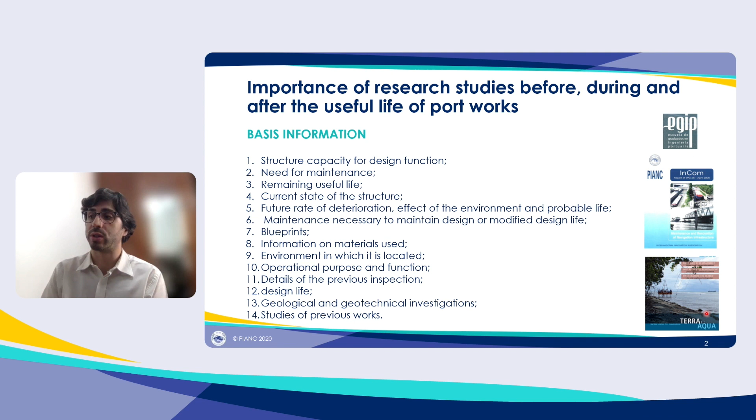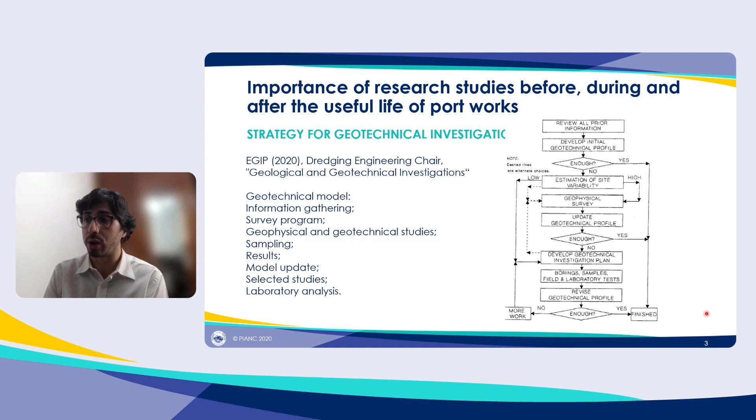As an example of a geotechnical investigation strategy, it is based on the information collected and the visit to the sites, allowing a good enough understanding of the problem to be able to propose a geotechnical model of the area under study. Based on the results obtained, a first measurement campaign is scheduled that includes a geophysical survey and surface sampling.

Understanding by all parties of the implication of going down early contractor involvement routes, and a shared willingness to accept the implication, are crucial to the achievement of benefits. Structuring an appropriate construction framework to deal with the early contractor involvement stage may be needed to provide the necessary confidence and protection. It's a strategy needed by infrastructure owners towards the main contractor, optionally expanded with stakeholders and subcontractors.

The purpose of this is to optimize value in project delivery and objectives through their participation and knowledge sharing in the stage of project planning and design prior to execution contract award. The hallmarks of a successful ECI process: good faith, transparency, equal treatment of all parties, fairness, clarity through clear rules of engagement, and protection of intellectual property.

The input of contractor expertise into the development of design and the definition of client requirements during the pre-construction phases of a project is particularly relevant to structures projects, including maritime and inland waterway related projects. It raises the convenience of the adequate provision of geotechnical information to avoid subsequent claims in contracts.

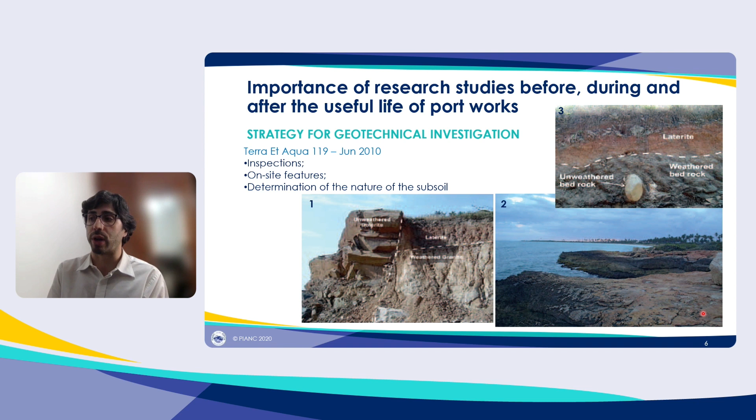Now we are going to see a sample of different strategies for geotechnical investigation for the convenience of adequate provision of geotechnical information to avoid subsequent claims in contracts. Picture 1, examination of shoreline rock outcrops may give a good understanding of the shore. 2, inspection of the site and surroundings is a vital part of the tender process for the contractor. And the last one, determination of the nature of the subsoil by viewing in situ characteristics.

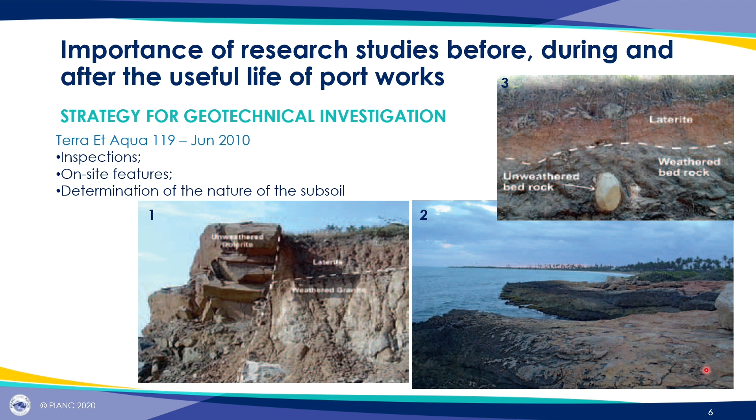In the ground, the potential of occurring problems indicates that damage is created when errors are made in the initial phase of the investigation: the definition of requirements and needs, planning, resources, and timing. It's important that the design of an investigation or a monitoring program suits the actual site conditions and construction characteristics.

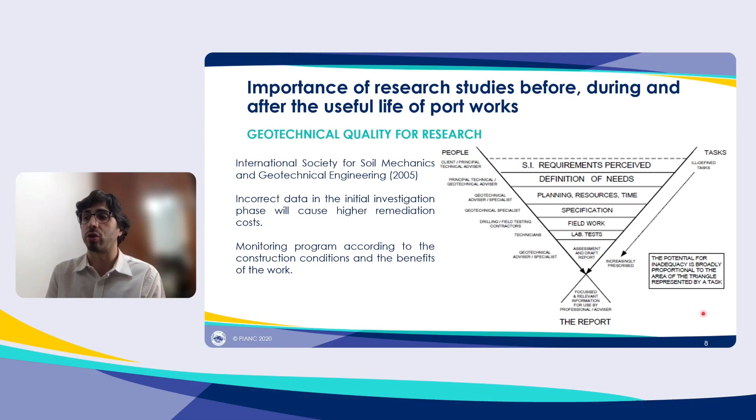The investigation program should be flexible so that adjustments to the program can be made during the investigation when necessary. The costs associated with redoing part of the investigation at a later stage, or the design, or alternative construction methods, are generally far greater than the cost of the original investigation.

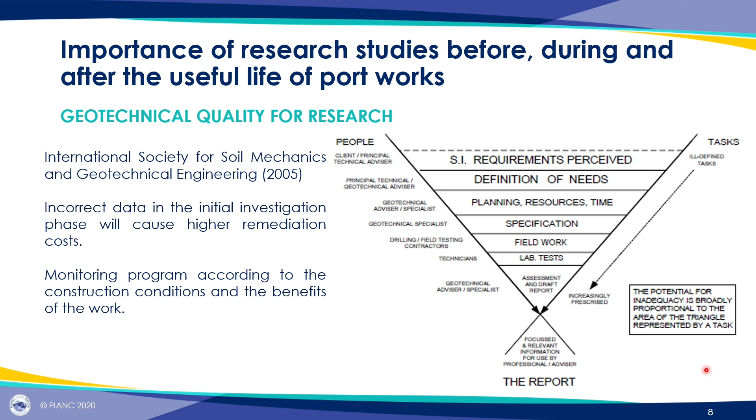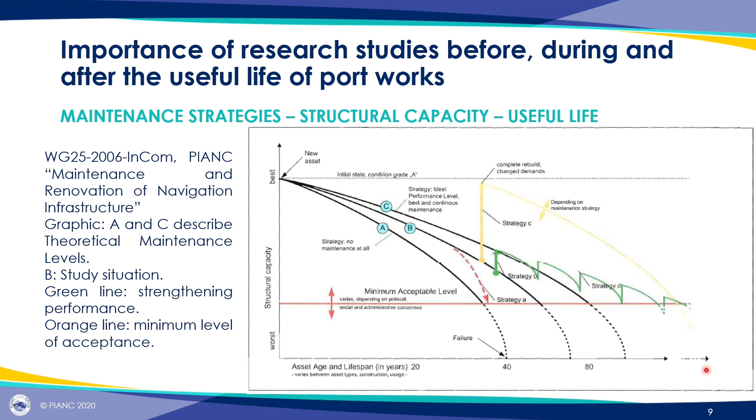Preventive and corrective maintenance. In applying different maintenance strategies, it is important to strike a balance between preventive and corrective maintenance. It must be understood that the use of corrective maintenance may result in the restriction of navigation traffic before it shows results. There are also significant influences on cost and maintenance level.

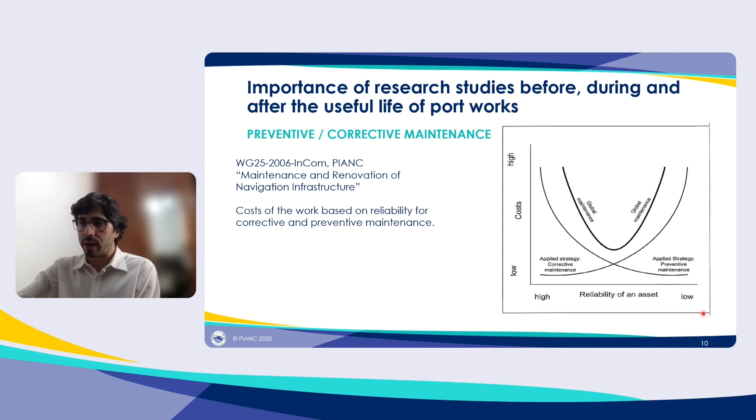The next one, emergency protection measures, for example, are by nature quickly built and not well-designed measures. The necessity to construct emergency protection can, to a great extent, be avoided by proper monitoring, planning, and funding.

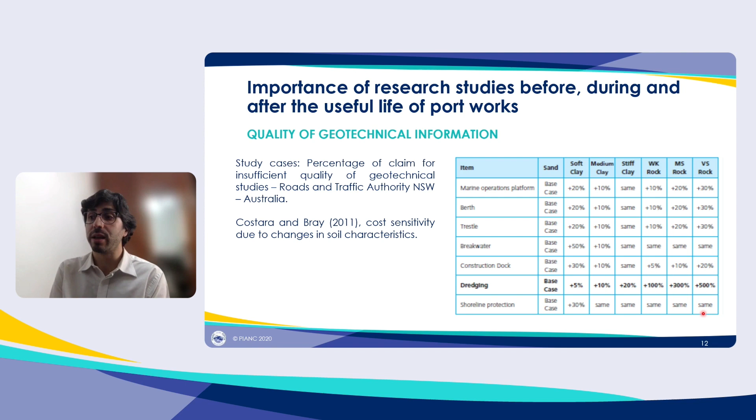The picture indicates the sensitivity of the cost of each of the components of the work to changes in the characteristics of the soil with respect to a base case. For the same, sand material was chosen, and the cost variation for other materials was calculated depending on the

type of structure. It can be observed how the maximum variation occurred in the case of the dredging works, increasing by 500% in the case that the soil is hard rock instead of sand.

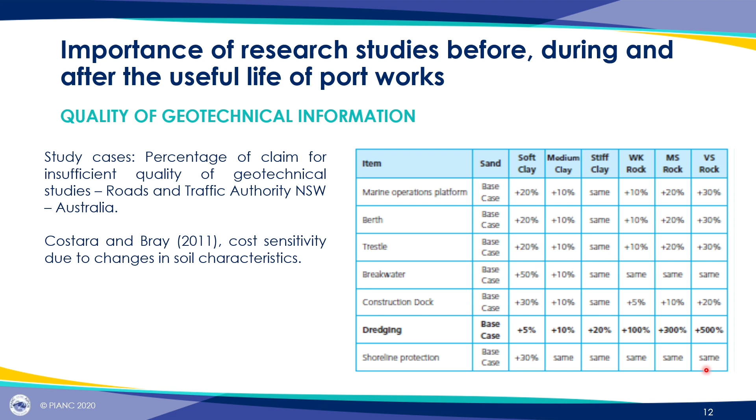The next one, groynes are normally strengthened structures perpendicular to the shoreline. They work by blocking the littoral drift, where they trap and maintain sand on their upstream side, for example. Sandbagging using easily available sandbags, such as geobags, is often used as emergency protection. However, such bags are not durable, which results in quick failure.

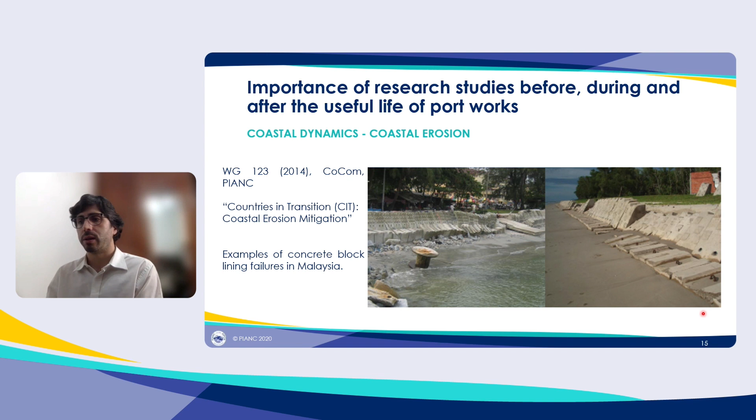The next one, we can see all structures require maintenance, but it's possible to design a structure requiring more or less of it. The total cost of maintenance is usually capitalized using a specific interest rate. Usually, structures with low maintenance require a big initial investment and low capitalized maintenance, while structures with high maintenance require low investment and high capitalized maintenance.

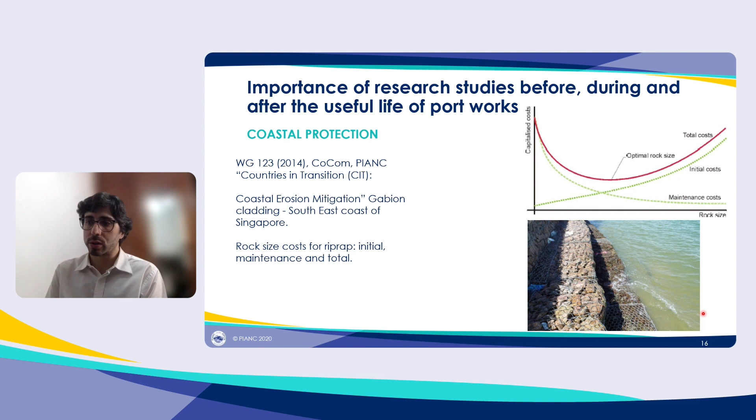For a rubble mound structure, the size of the armor unit is an important cost factor. Capitalized cost versus rock size of armor unit for a rubble mound structure is divided into the following cost elements: initial, maintenance, and total. The larger the armor rock, the lower the maintenance cost. However, large rocks are initially more expensive than small rocks. The optimum point is where the total combined costs of initial works and capitalized maintenance are minimized.

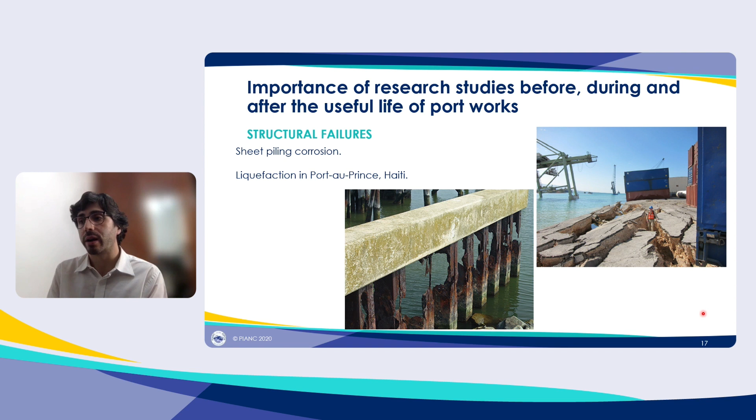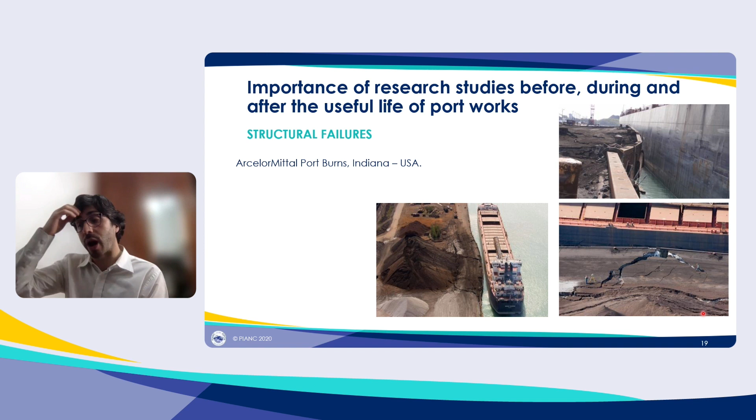The last case of structural failure is due to the overload of iron near the pier in the USA.

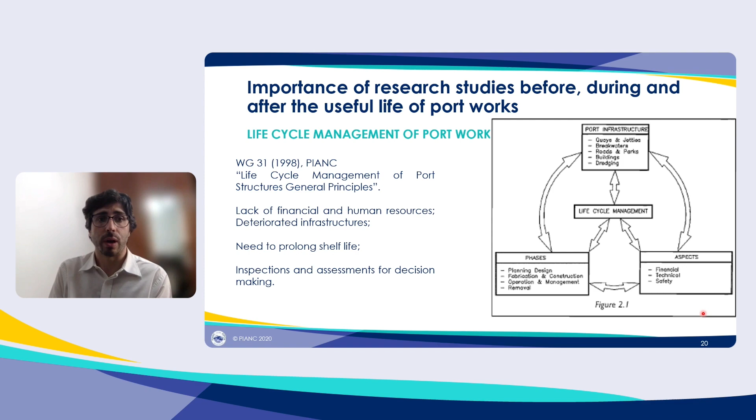Well, in this case, we can see life cycle management of port works. Port structures, during the life of the structure, are subject to the life cycle process. In general, life cycle management refers to a concept which considers the relationship between the phases of the life of a structure and important key aspects.

The report of this work identifies four phases in the life cycle: planning and design, element fabrication and construction, operation, and removal. The aspects considered are financial, technical, and safety. The purpose is to provide owners with a cost-effective and practical system to facilitate the maintenance of port infrastructures throughout their service life.

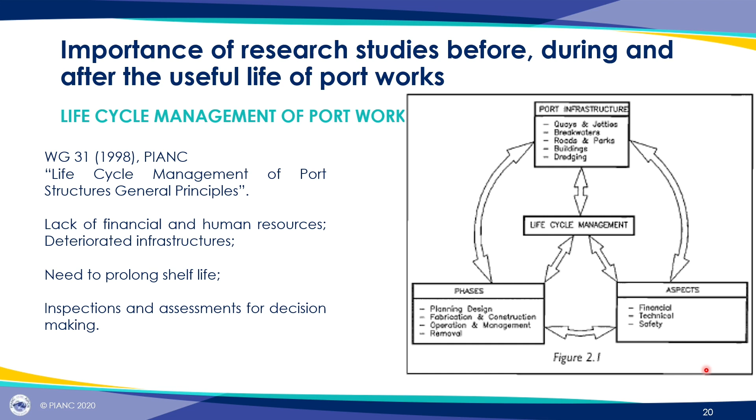The preservation and long-term use of existing facilities depends on the efficient operation, maintenance, repair, and renovation of these structures. The need to prolong the useful life of infrastructures beyond the original design requires knowledge of it and its importance based on effective inspection regimes, data recording, and presentation of results in a way that is relevant to decision makers.

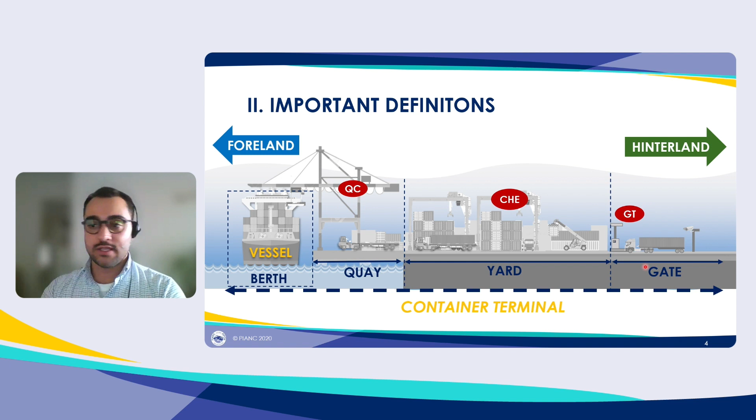Then you have all the superstructure of the container terminal, that is all the equipment available. On the quay you have the quay cranes, and in the yard you have the container handling equipment. We have different mixes, which also affect the capacity of the terminal, because every kind of equipment has a requirement for the stacking height you can achieve, and the gates also have different system technologies available.

Now let's look again at the outlook of the infrastructure we have in the Brazilian container terminals. As of today, we have around 16 container ports. I counted about 20 container terminals, 47 dedicated berths, 120 quay cranes, in the 2021 survey. Overall, we have 16.2 kilometers of quay length.

Next slide, yes. We also have around 637 or 638 hectares of terminal area, counting all the terminals, and about half of that area is yard area. Counting all the terminals together, it's about 17 million TEUs of annual capacity for all Brazilian terminals. This represents about 441 thousand TEUs of static capacity, the volume that all the terminals can store statically.

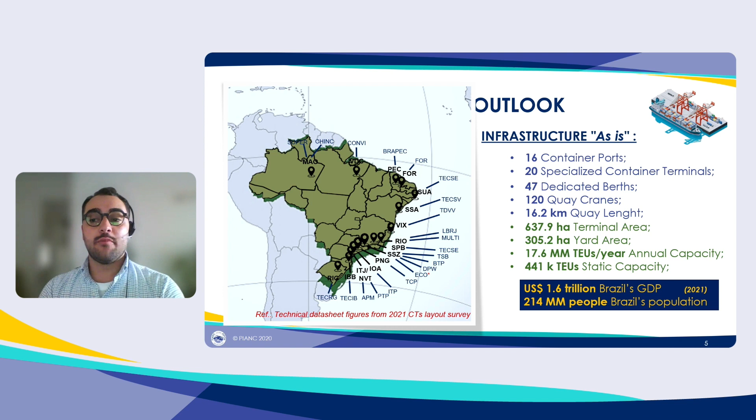All this infrastructure is serving 214 million people, the Brazilian population, and Brazil has a GDP of around 1.6 trillion dollars.

In the next slide, I will show the to-be, the future projects that I have surveyed in Brazil. As I said before, we had 16 container ports, and we add 2 more in the future projects, so we will get 18 in the future. We are about to get 6 more container terminals, adding 17 more berths and 53 more quay cranes.

It's just an estimation based on what I have got on the news. So we also have to add about 6.5 kilometers of quay length, almost 400 of terminal area, and some 10.9 million TEUs of capacity in the overall project. So in the future, we are about to get 28.5 million TEUs of annual capacity, counting all the Brazilian

infrastructure. So in the next slide, I will show how to measure, how to calculate capacity. As we know, we have the PIANC Working Group 158. In the PIANC working group, in chapter 6, we have the formulations to calculate container terminal capacity. But the most important thing to keep in mind when measuring capacity of any existing or new terminal is the time spent in every area of the container terminal. So it's about the berth time.

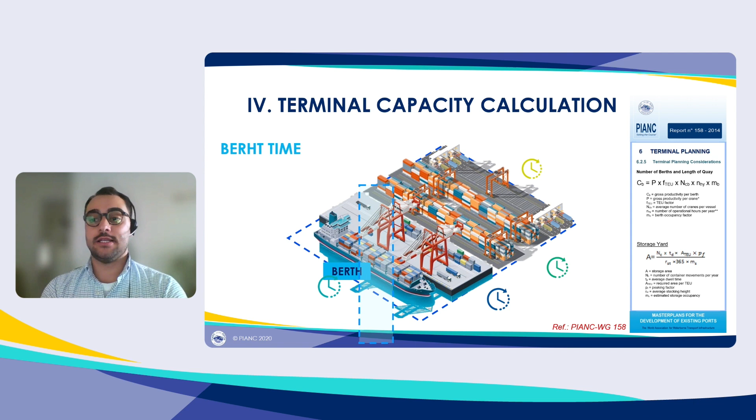In the berth time, you have the time that the vessel spends on a berth. It's really important to measure, because it determines how many vessel calls the terminal can receive. Then the service times, which refer to how many moves every quay crane can do. So you count the crane intensity of the quay cranes that you take as your benchmark, and then you project the service you can do.

And the container dwell time: as the yard is the heart of the terminal, the container dwell time is one of the most important time measures to determine the terminal capacity. When we count the volume the terminal can receive in TEUs, you consider the yard measure, so the container dwell time. And you also have the gate. The gate is all about the gate cycle time, how many entrances you can perform per hour, per day, but you also have to consider the peak times that really stress your infrastructure.

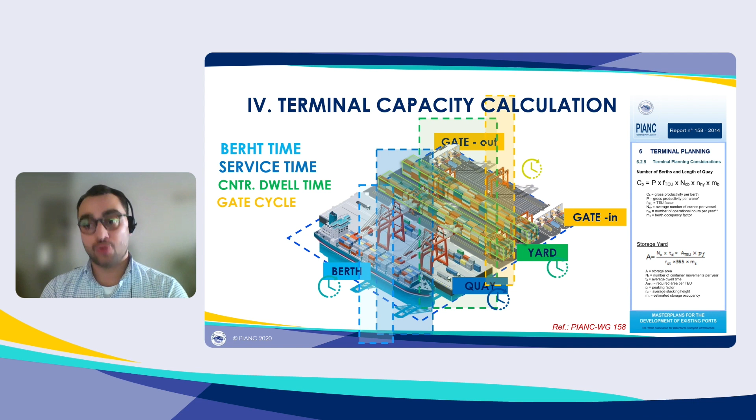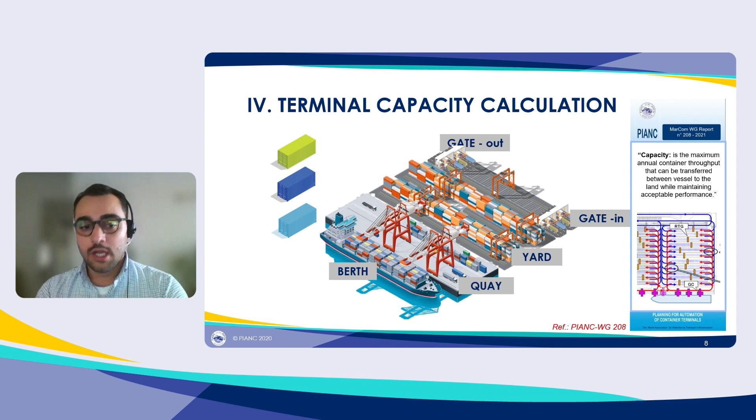So I just showed the overall formulations to understand the capacity calculation of a container terminal. But if you want to look more refined, you need to segregate and understand the flows that pass through your terminal and take these numbers. Basically, for the import flow, you have one container unloading from your vessel, so one move for your quay cranes and the gate out. For export containers, you have the gate in of a container and the loading of the container on

the vessel. But for the transshipment and restow flows, you have a container unloading and going back to the same vessel or another vessel for loading. If it's transshipped, it's another vessel. So you have two moves, so you count this number twice. The number that we have in the statistics is based on the container throughput.

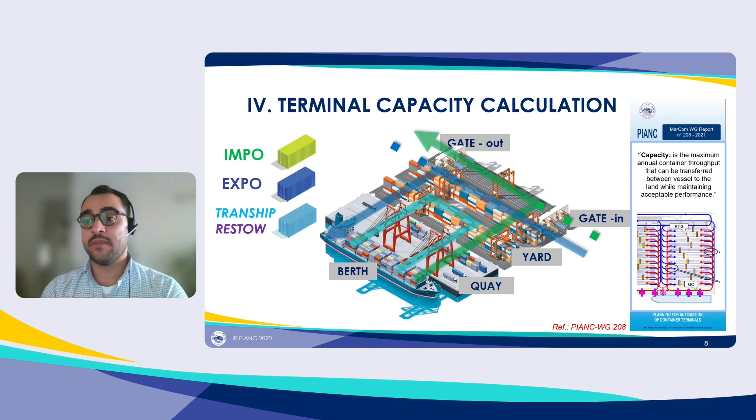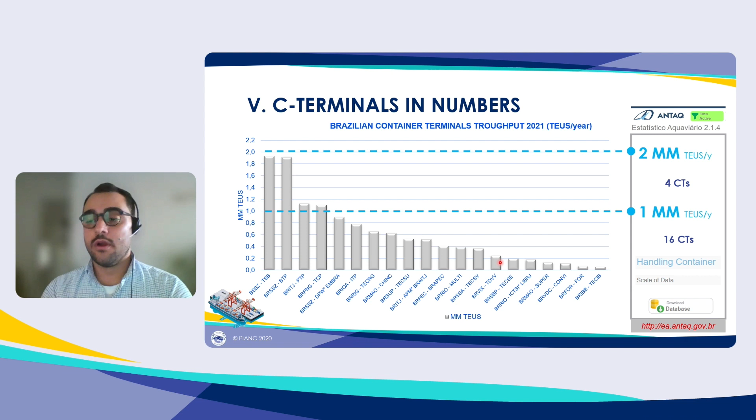When we look at the Brazilian statistics of container terminal handling, we have the ANTAQ database. It's quite a good, open source database. In this panel, I've shown the throughput of 2021, how many TEUs per year each terminal moved. I've drawn a line to show the 1 million and 2 million classes of terminals. In the 2 million class, we had 4 terminals in 2021, and in the 1 million class, 16. As I'll show in the next slide, you can see the year-to-year growth, and DP World is about to join the class of over 1 million TEUs throughput this year.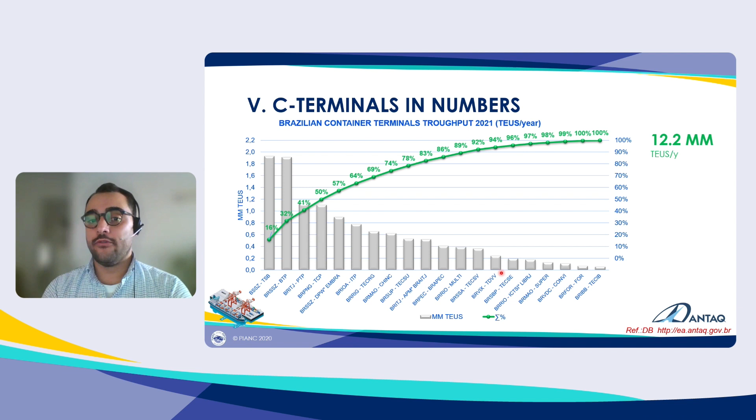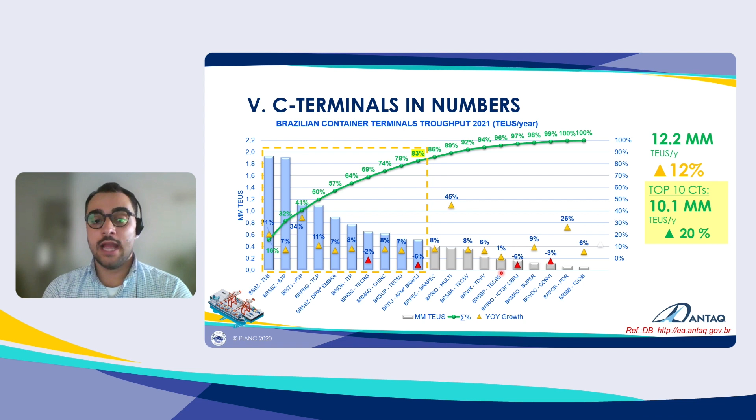When we accumulate all the handling of the Brazilian container terminals, we have the mark of 12.2 million TEUs handled in 2021. Compared with the pandemic time, we can see how resilient the Brazilian infrastructure is, because despite the pandemic, all the container terminals together have grown 12%. It's a good number compared to other terminals in the world. And the top 10 terminals handle 83% of all the volume handled in Brazilian ports, also with 20% growth, at 10.1 million TEUs. It's quite a considerable number for the top 10.

Now in the next slide, I'll compare the capacity and the throughput, and in the end I will show the occupancy. When we put together the capacity estimated based on dwell time, for Brazilian terminals the dwell time is an estimation, but we have a fluctuation of 5 to 6 and 7 to 8 days, depending on the terminal, the location, and also the business strategy of each terminal.

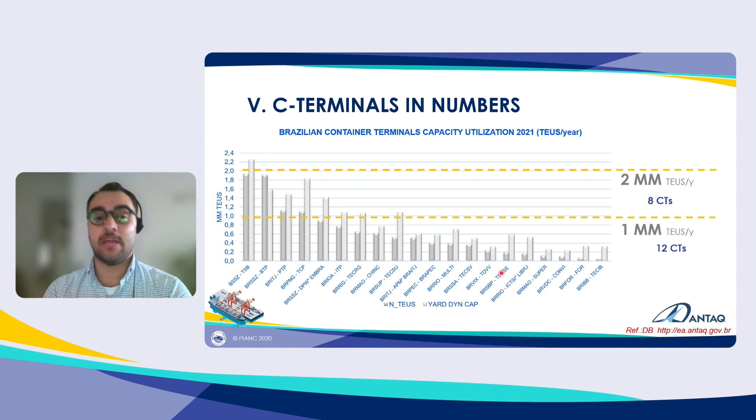If the terminal retains more import flow for a longer time, it has a higher dwell time. But looking at the capacity classes of terminals, we have 8 terminals in total between 1 and 2 million, and 12 under this number. But you can see Manaus is also almost there. We also have new investments upcoming, some terminals that can reach this mark of 1 million.

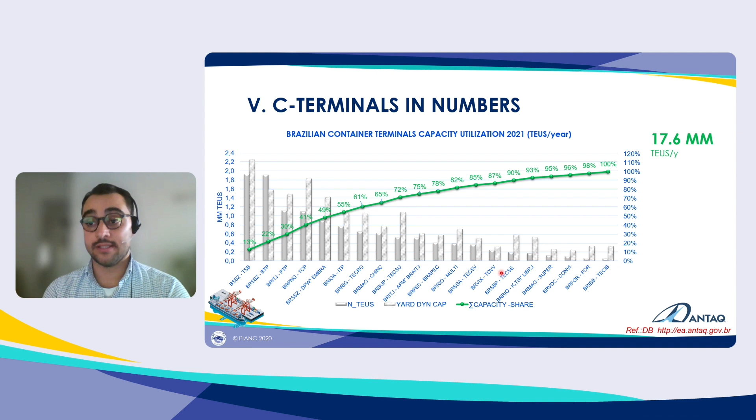So with this estimation, accumulating the capacity of the container terminals, we get 17.6 million TEUs a year. It's an estimation of the Brazilian capacity in this scenario. When we cross this with the curve, we can see the occupancy. The occupancy is a quite sensitive KPI. It fluctuates month to month, but on average you can see this number. It's reflecting the terminals' demand for 2021.

But in one case, the BTP terminal in Santos, you can see it's over 100. Why are these numbers over 100? Because during the calculation of capacity, I consider the operational index of capacity, so it's a bit higher. If we look again at the top 10 container terminals, we get 10.1 million TEUs of capacity with 76% occupancy for this top 10.

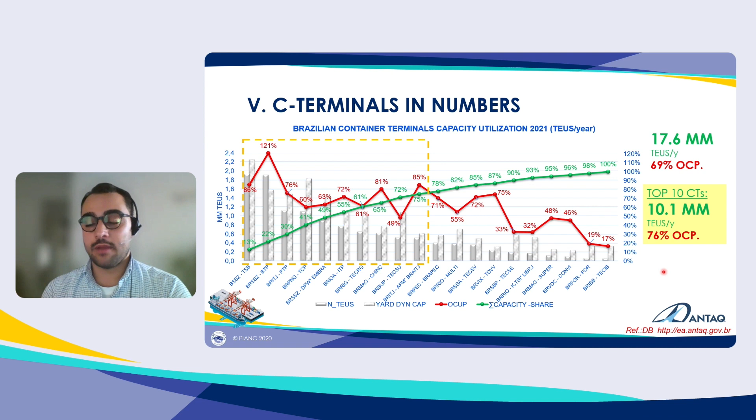In the next slides, I will present a technical review, not of all the container terminals, but just some of the most important, starting from Manaus. So how I measure this capacity, how I calculate and analyze technically to make a technical data sheet of container terminals. We have the statistics based on the ANTAQ database, but to collect updated information about the yard area, the terminal area, the berths and the quays, I used some mapping tools, and we can also do this by consulting the master planning reports. I'll show some numbers of the Brazilian terminals, some capacity estimations, and some differences of each terminal.

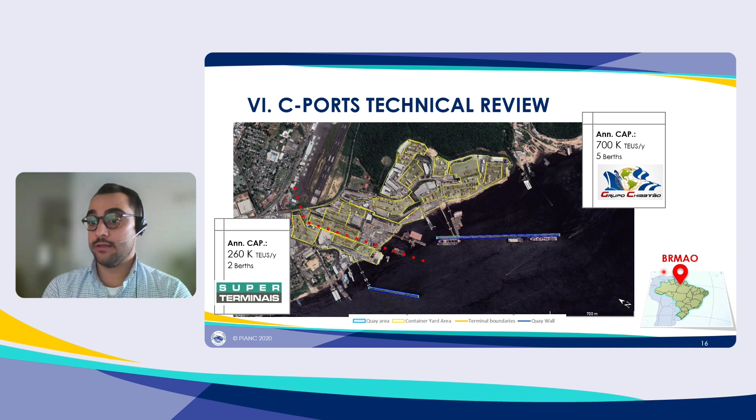As you can see, in Manaus port we have 2 container terminals that are linked together: Super Terminais and Chibatão group terminal. The nature of this terminal is about the Amazon River, so we have a floating jetty structure as the quay infrastructure. You can berth on both sides of this floating jetty, so you can have 2 vessels in each berth. And the yard system shown here is RTGs.

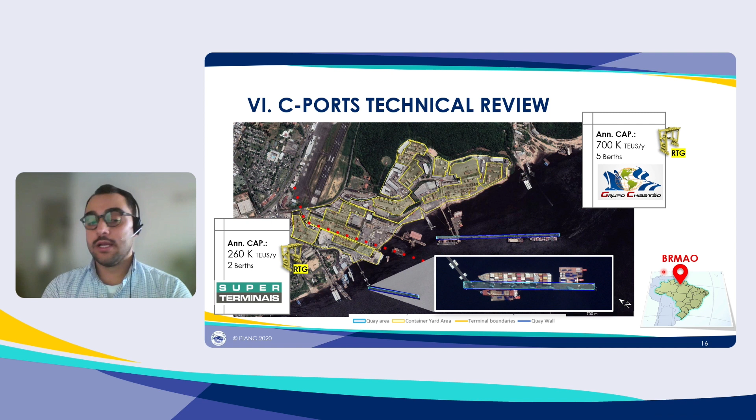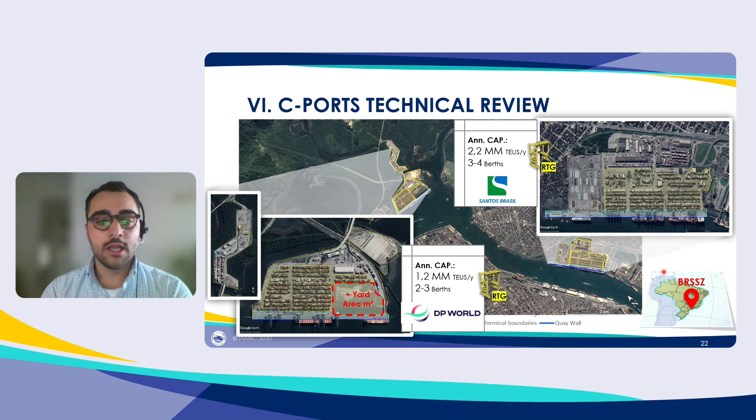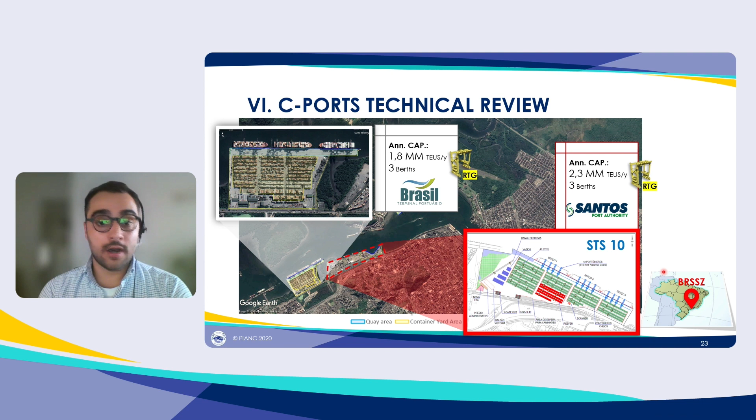So yes, that's the presentation. That's just a quick overview of the Brazilian container ports and the calculation I use.